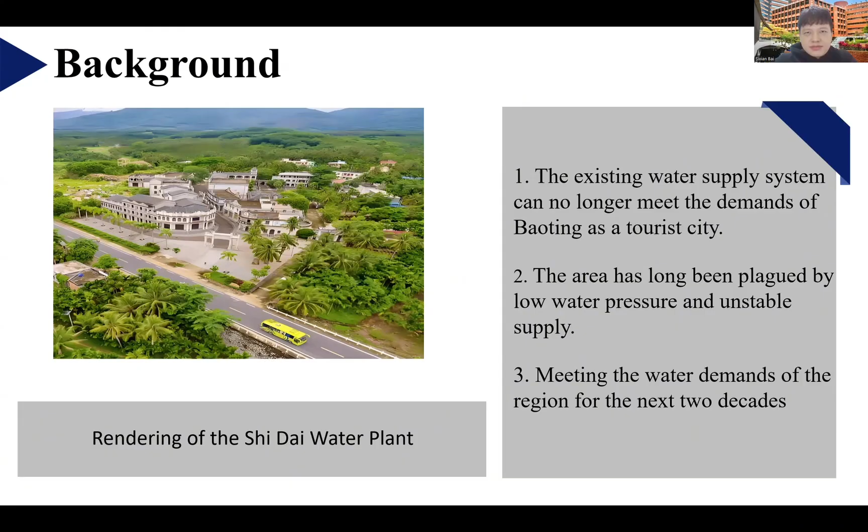This project is expected to cost around 1.2 billion Hong Kong dollars and will take about a year to build. To make sure everything stays on track, we are using a linear programming model to smartly manage resources as things move forward, because this project involves a lot of back and forth between civil works and mechanical and electrical installation.

That's the reason why we've based our references on studies that use simulation and cost analysis to optimize how wastewater treatment plants are designed and run, which has been shown to cut down their long-term cost. There is solid evidence that using smart time-saving strategies in water plant construction can boost economic return without sacrificing quality.

Okay, now let my teammate Yinai Lu talk about the work decomposition and quantification. Thanks, Bai. Now let's go to the second part, the work decomposition and quantification.

At the beginning of the work, we need to have the work breakdown structure. We divide the project into 4 levels. Level 1 is the project overall — we need to represent the complete Shidai water plant and water distribution network project.

Level 2 covers the major phases. We need to divide the project into key engineering phases, such as preparatory work, water intake, and dam construction.

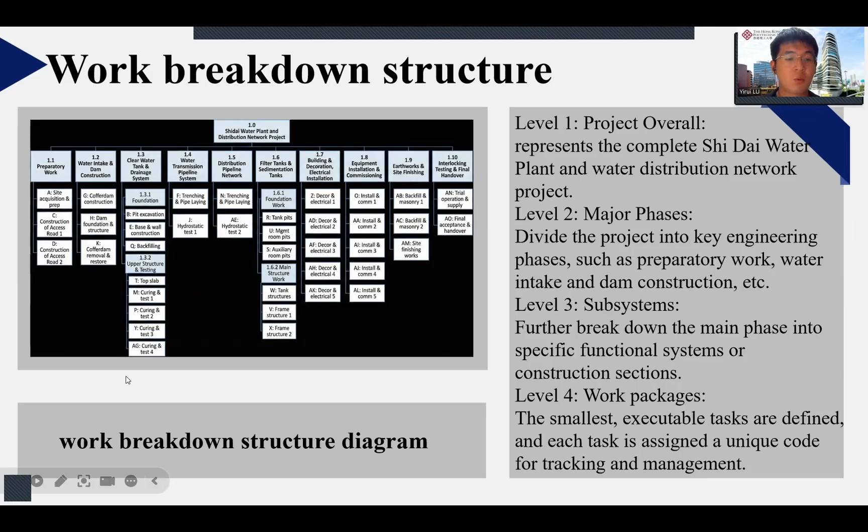As you can see on the left of this page, it's the work breakdown structure diagram. After that, we need to estimate the workload.

Now I will show you work package B as an example. As you can see on the left of the page, it's the excavation of the foundation pit for the clear water tanks and the drainage and sludge discharge tanks. The excavation dimensions are 50 meters in length, 30 meters in width, and 6 meters in depth.

We need to consider the slope release and the earthwork volume calculation coefficient for this working face, about 1.1. Then we can calculate the engineering quantity, about 9.9 thousand cubic meters.

Then we can also calculate the comprehensive unit price, about 85 Hong Kong dollars per cubic meter. And then we get the total cost of package B, about 841,500 Hong Kong dollars.

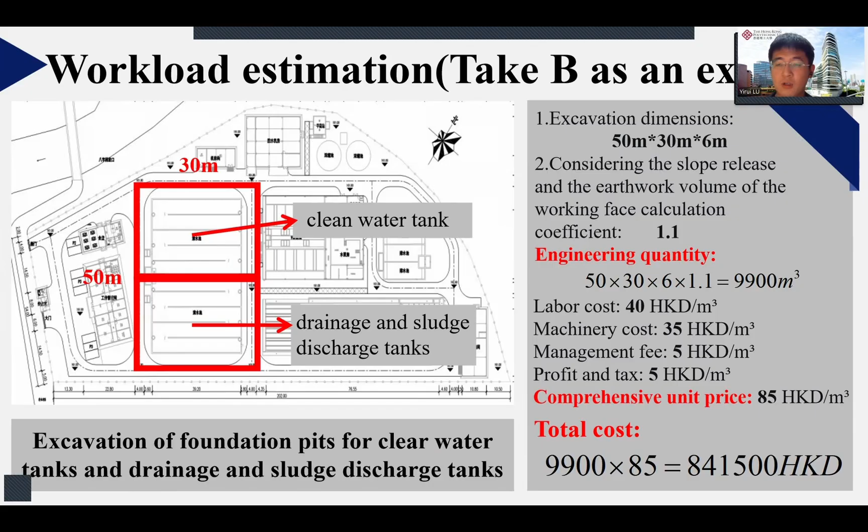That's all for my part. I will now walk you through our construction schedule estimating using the main structure work as a representative example.

We began with 2 key scope elements: the base slab for the filter beds and the sedimentation tanks, covering 3,000 square meters, and the main reinforced concrete structure, totaling 6,151 cubic meters, which includes the base slab, side walls, and the roof slab.

Based on Hainan's local work standards, the typical productivity for base slab construction is 100 square meters per day.

Therefore, the base slab requires 3,000 divided by 100, resulting in 30 days, a duration with very limited room for compression due to its fixed efficiency.

For the main structure, under conventional methods, the required time would be approximately 35 days, calculated from a productivity rate of 94.63 cubic meters per day.

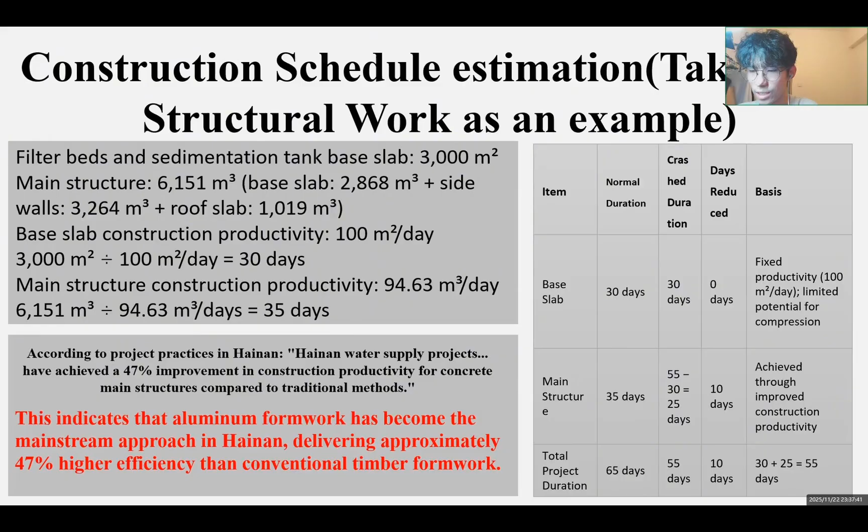This efficiency gain, and by adding a second construction crew, we can compress the main structure duration from 35 days down to 25 days.

So as a result, the total project duration is reduced from 65 days to 55 days.

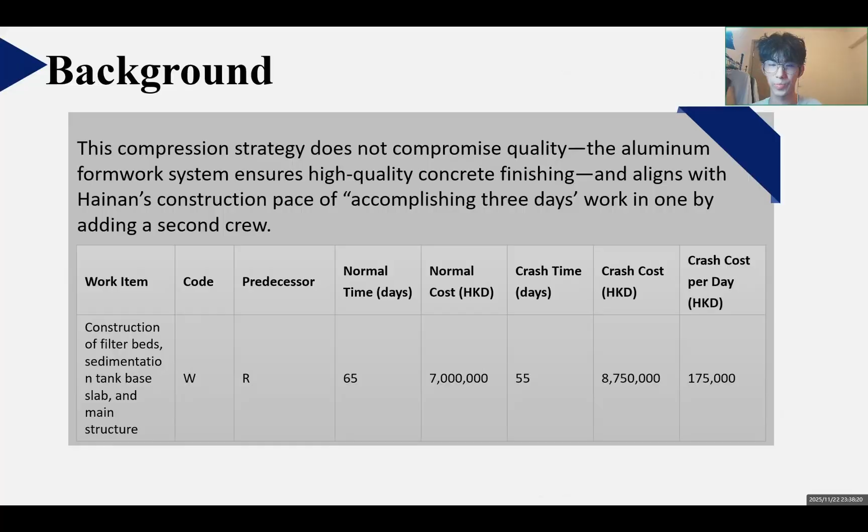In an AOA diagram, the arrows represent the tasks themselves, and the nodes are event points in time, like the start or finish of a task.

The horizontal length of each arrow represents that task's duration. The logic is similar to an AON diagram. This diagram is built using each task's normal time.

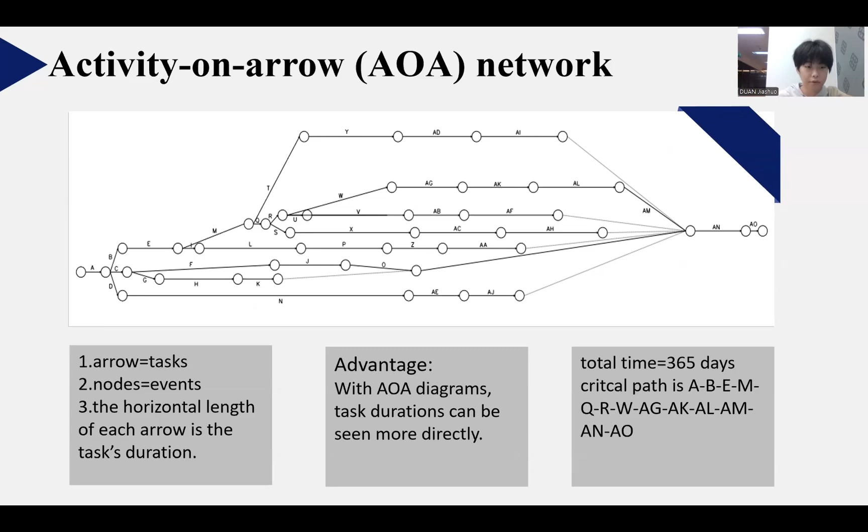In a Gantt chart, each horizontal bar represents a task, and the length of the bar directly represents the task's duration. You can see at a glance, when a task starts and ends, which tasks are running in parallel.

The tasks on the critical path, which I have highlighted here in gray, are connected back to back from start to finish with no slack.

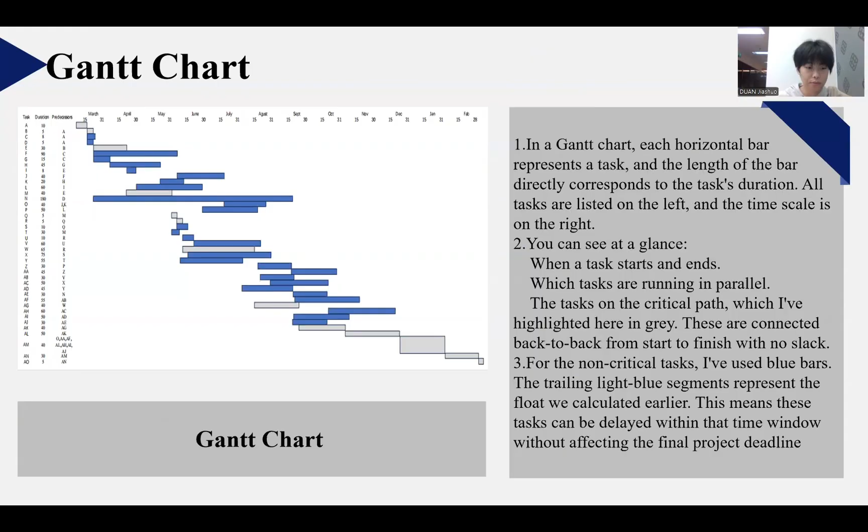For the non-critical tasks, I've used the blue bars. This means these tasks can be delayed within that time without affecting the final project deadline.

Now, turning to my part, which is the optimization analysis of the project progress. To begin with, we extract all necessary data from the provided AON diagram and the project information table.

This allowed us to determine the key constraint for our model, including the range of the compressible days for each activity and associated crash cost per day relative to their normal duration.

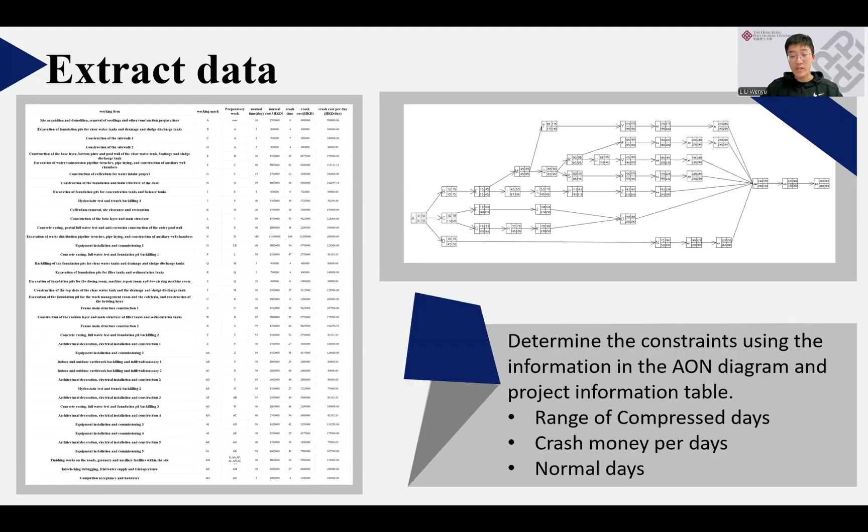With this foundation, we set the boundary condition and define our decision variables, namely X for the activity scheduling and Y for the available crash time.

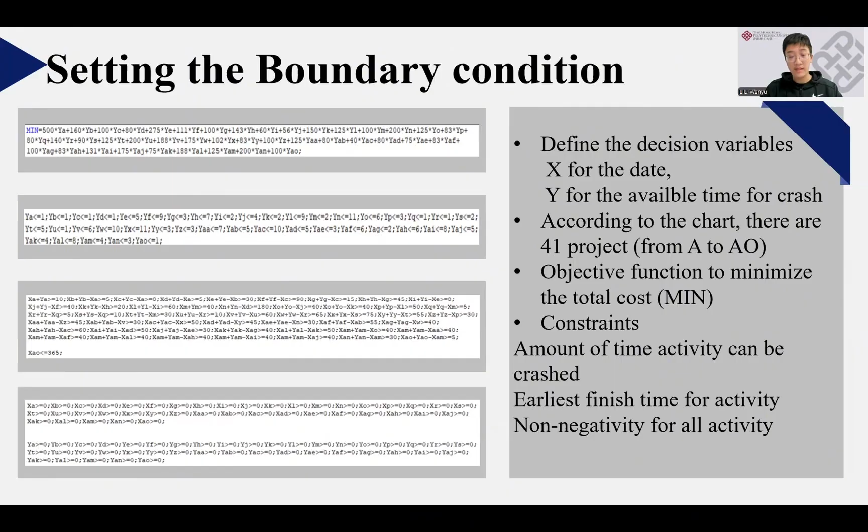Our objective function is straightforward: to minimize the total project cost. The main constraints we incorporate are the maximum amount of time an activity can be crashed, the precedence relationship ensures the earliest finish time for each activity is respected, and the non-negativity for all variables.

The model was built and analyzed using Lingo. We input and simplified the data table for the 41 project activities from A to AO to streamline the computation process.